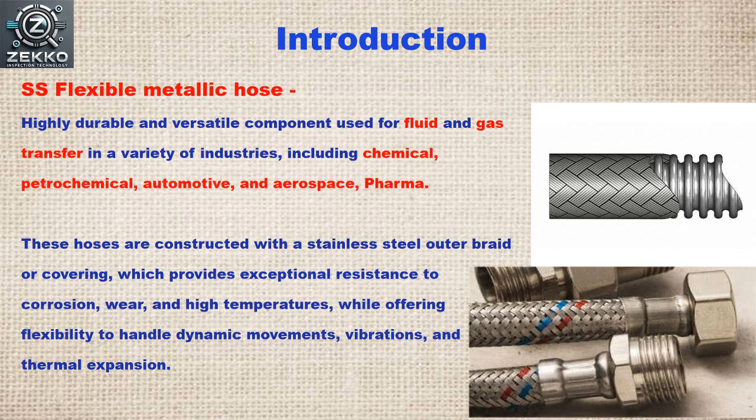Let's begin. Generally, SS flexible metallic hoses are tough and versatile. They are used for fluid and gas transfer in industries like chemical, automotive, aerospace and many more. They are made with a stainless steel braid. They resist corrosion, wear and high temperatures while staying flexible to handle vibrations and thermal expansions. These hoses are designed for extreme pressure, heat and vibration, ensuring they perform when it matters most. The inspection of these hoses is a critical procedure that ensures their reliability and safety in a variety of industrial applications.

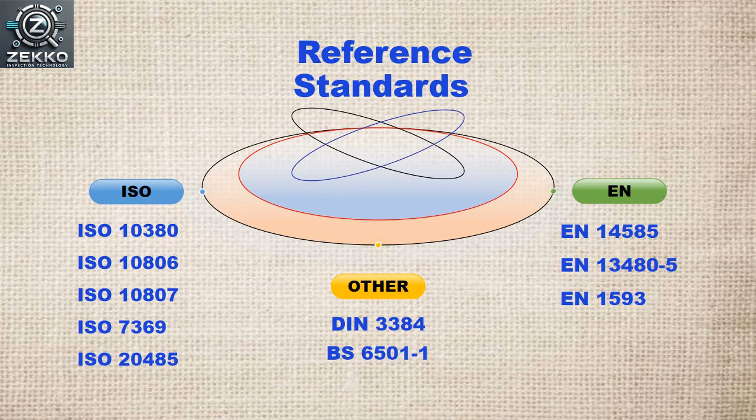Now here, the reference standards shown support flexible hose inspection at all stages, right from manufacturing to final certification and marking. While a few key standards are provided here for quick reference, the inspector must select the appropriate standards based on the purchase requirement, purchase order, project scope or client requirement. Final acceptance is granted upon compliance with the relevant standard and proper product marking.

Now here we will quickly check basic types of these flexible metallic hoses. There are five types. The first type is annular corrugated hoses. Annular corrugated hoses are flexible metal hoses made from stainless steel with ridges or corrugations that let them bend easily without kinking and handle high pressure and heat. Second type is braided flexible metallic hoses. These have a corrugated metal tube with a stainless steel braid on the outside which adds strength, protects from damage and keeps the flexible hose intact.

Third type is helical spring hoses. These are made with a spiral metal design offering good strength and flexibility but are less flexible than annular hoses and used mainly for low pressure jobs. Fourth type is interlock hoses. Interlock hoses are made by linking metal strips together, creating a strong and flexible hose that handles movement and vibration very well. Fifth type is smooth bore hoses. These hoses have a smooth inner surface that reduces flow resistance and makes them ideal for high flow rate fluid or gas transfer.

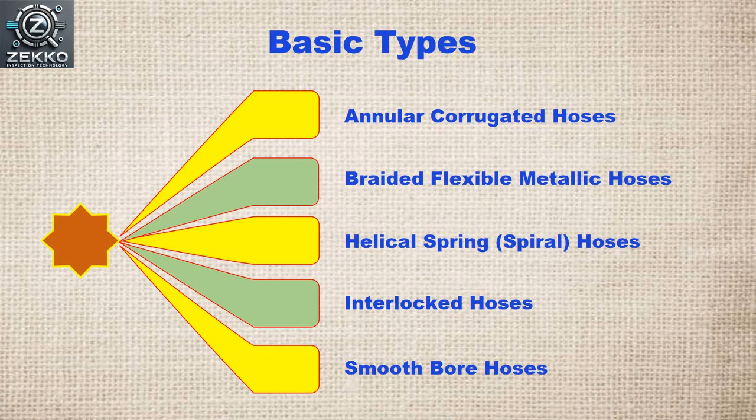We will turn to our major part, key inspection parameters. So here for inspection of flexible hoses, there are many checkpoints. The first point is visual inspection. In visual inspection, we can check the hose surface for cracks, corrosion or damage. We shall inspect welds, weld joints and fittings for defects or leaks. We have to verify marking for size, rating and certification accuracy.

Second parameter is dimensional checks. Check that the hose length and diameter match the approved drawings or standard. Inspect braided hose to ensure full and uniform coverage over the inner core. Verify that all components including the core, braid and outer cover fall within specified tolerances. Accurate measurement ensures proper fit, functioning and long-term reliability.

Third point is corrugation and braiding integrity. Carefully inspect the corrugated section for wear, stretching or cracks that could affect flexibility and pressure resistance. Check the braided layer for broken wires, fraying or gaps. Any damage here weakens the hose strength. Both the core and braid must be in good condition to ensure safe and reliable performance under pressure. A thorough visual check helps to prevent failures in critical operations.

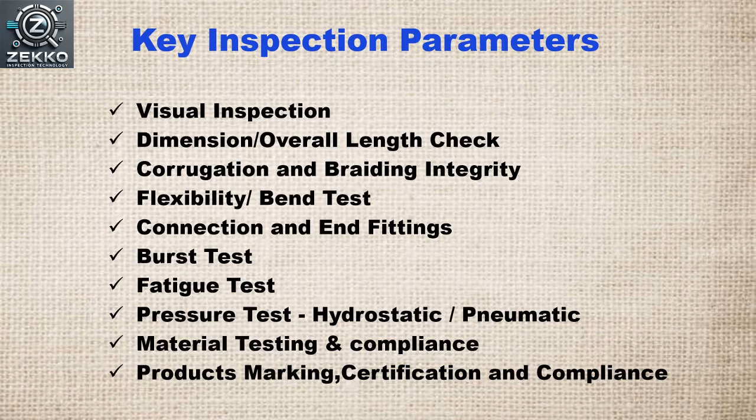So friends, now we will see the non-destructive part which is involved in the metallic flexible hose inspection. So this part is optional. There are 3 to 4 non-destructive tests which we can conduct on the flexible hose. So first test is helium leak test, which is conducted in case of cryogenic service. This is a highly sensitive method used in cryogenic systems to detect minute leaks in stainless steel flexible hose. Helium is introduced into the hose assembly and a mass spectrometer is used to identify any escaping helium, ensuring the hose is airtight and capable of handling extremely low temperatures.

Next test is ultrasonic test. This test is conducted on raw material of hose and fittings before the manufacturing or assembly of the flexible hose, and it is carried out only when required in the specification. This is a non-invasive test that helps to identify potential issues in raw material like cracks or other material defects that may affect the hose performance.

Another test is dye penetrant test. This test is conducted on the final completed hose to detect surface cracks or imperfections, making this a reliable method for detecting surface level defects.

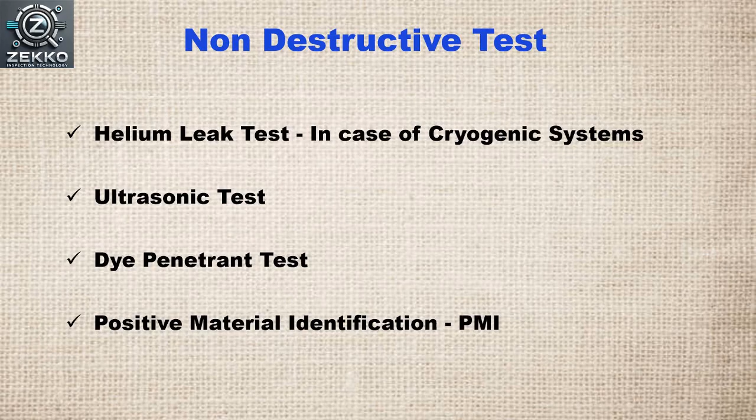And the last test is positive material identification, which is called PMI. Generally this test is conducted on hose assembly after manufacturing is completed. This test ensures that the material used in the construction of flexible hose conforms to the required standard. PMI verifies the chemical composition of the material, confirming it meets the specified material grade and performance requirements.

Guys, we will see some common defects which are observed during the metallic flexible hose inspection. So first defect is incorrect length or misalignment. This occurs due to manufacturing errors or inaccurate measurement results. Second defect is kinks or bends. This can happen due to over tightening, excessive bending during installation or poor handling. Third defect is corrosion. This includes galvanic corrosion from contact with dissimilar metals, surface contamination from iron particles or debris during handling, or inadequate cleaning or passivation, which can leave residues that compromise the hose corrosion resistance.

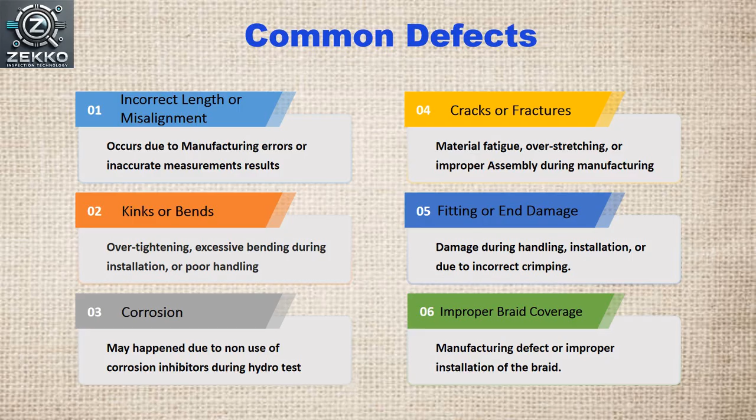Then next defect is cracks or fractures. This can happen due to material fatigue, overstretching or improper assembly during manufacturing. Another defect is fitting or end damage. Damage can occur during handling, installation or due to incorrect crimping. Then next defect is improper braid coverage. This can happen during manufacturing and due to improper installation of the braid. Then another defect is improper crimping, that is inadequate crimping pressures or uneven crimping during manufacturing. So we have to check this defect also during the inspection.

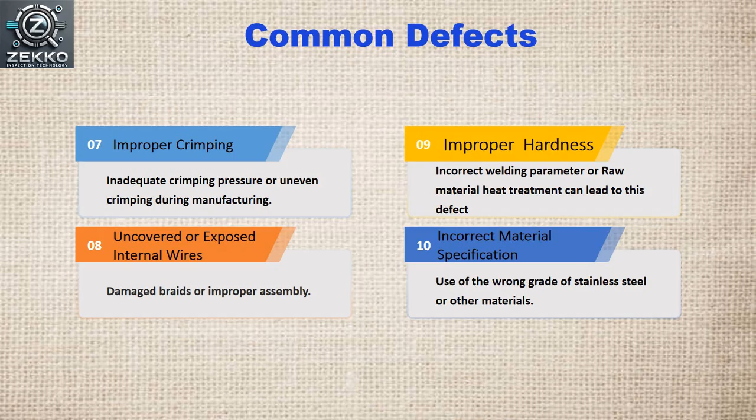Then next defect is uncovered or exposed internal wires. This can happen because of damaged braids or improper assembly. Another defect is improper hardness, which occurs due to welding. So incorrect welding parameters or raw material heat treatment can lead to this defect. And the last defect is incorrect material specification. So use of wrong grade of stainless steel or other material we need to check during the inspection.

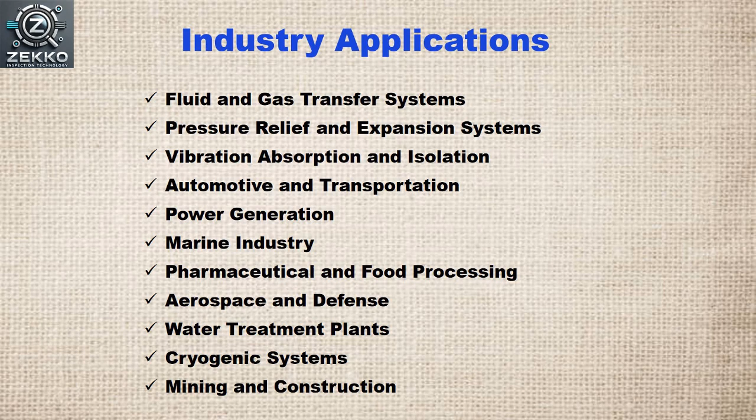Now we will take a quick look at common industrial applications. So flexible metallic hoses are used in a variety of applications and industrial sectors. So first sector is fluid and gas transfer systems, pressure relief and expansion systems, vibration absorption and isolation systems, automotive and transportation, power generation, marine industry, pharmaceutical and food processing, aerospace and defense industry, water treatment plants, cryogenic systems, mining and construction systems. Thank you friends, hope you like this video on SS flexible metallic hose inspection.